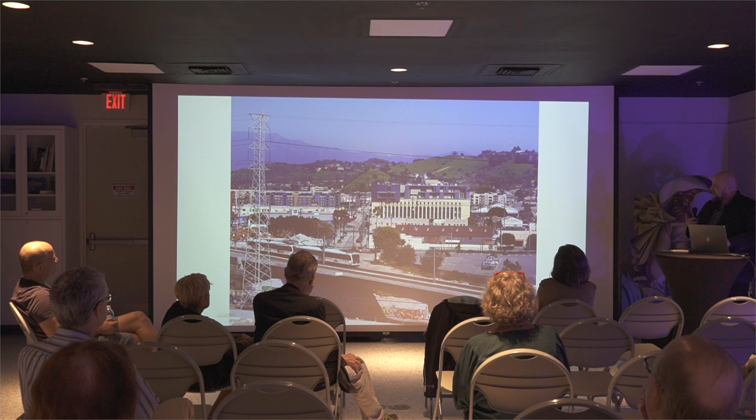This was done right at 2009, so it was at the wrong time in the market, as you would say. But you can see the quality of adaptive reuse, how sometimes old buildings can be brought to new life. This is just one of those examples.

A recent project we worked on - we like to do a lot of community infrastructure. These are parks projects, public realm projects, projects that are really near and dear to us. My partner Larry always says we don't have a specific typology we chase. We're known a lot for our affordable housing, probably about 50% of our work. But as he would say, we would do a doghouse as long as you'd let us design it well. We just care about design, sustainability, and the communities we're working in.

This project happens to be in Pompano Beach, Florida. I don't know if you're familiar with the Sample McDougald house, but that was a pioneering family in the early 1900s that came to - if you know Sample Road in Broward County, it was named because of the pioneers, that was their last name. It was a pineapple farm. The McDougalds actually bought the house from them, but they moved this house as part of the historic preservation of the home.

It was in jeopardy of being demolished. They moved it, and this number 2 is over that historic Sample McDougald house. What they asked us to do - this is a museum, the house is actually a museum built out of Dade County pine. It's a beautiful pioneer example of this early vernacular, cracker vernacular type house in this area.

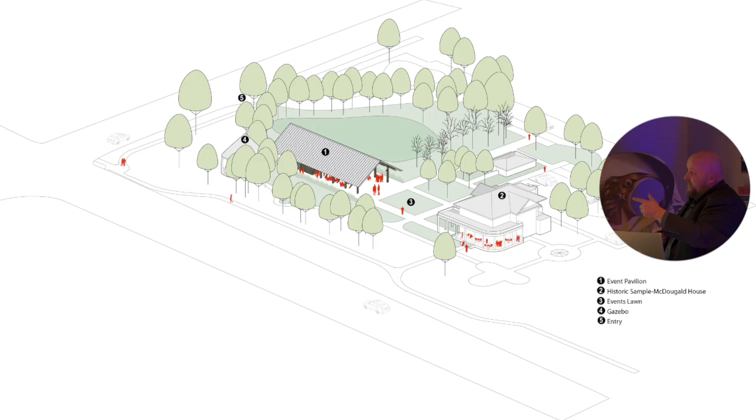The site is called Centennial Park - it was the 100-year anniversary that they developed this property. The house was moved there, and they asked us to put in a permanent open air pavilion for what the client called jelly jar weddings. They wanted a pavilion that could generate income for the property to support the museum and do other things.

They wanted the open air pavilion to look a lot like the house, and we said that was a mistake. So the first thing we really thought about was how do we make the building look laconic - that is, iconic, we all know, right? Big, bold. As an architect, you always want to do that; you want your building to stand out.

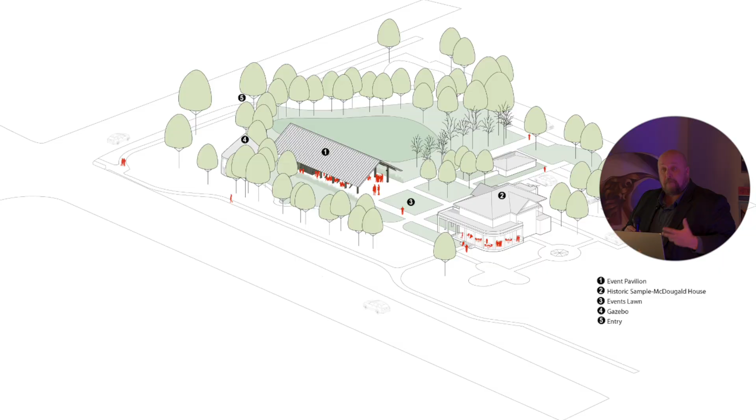But we thought this historic building was so incredible, we took a point to move it away from the home, tuck it into the trees, open up to the prevailing breezes to the southeast. North is actually the bottom of the page heading out, over this kind of open retention pond they have. And then really made it look more like an open barn building to that property.

But one of the key things we thought about too was, when you're in a wedding, it frames the historic home, so the whole historic home becomes the backdrop of this pavilion. It was really a challenge working with the community leaders, the city of Pompano Beach, and the Sample McDougald Preservation Society, because we were always talking about how this architecture was going to come to be to celebrate the architecture already on this site.

It wasn't until we finished the building, closed it down, and now they have events planned almost every weekend for the next two years, that it changed the mindset of this. So this building is actually becoming heavily used, having these kind of jelly jar weddings, but again paying homage to the original structure by just literally setting back

This also becomes shade infrastructure for the community. This is going to be for kids soccer, and if anybody knows, little boys love to destroy things, so we had to make this the most robust building that we possibly could. It's really a concrete jacket with this kind of yellow box rib inside.

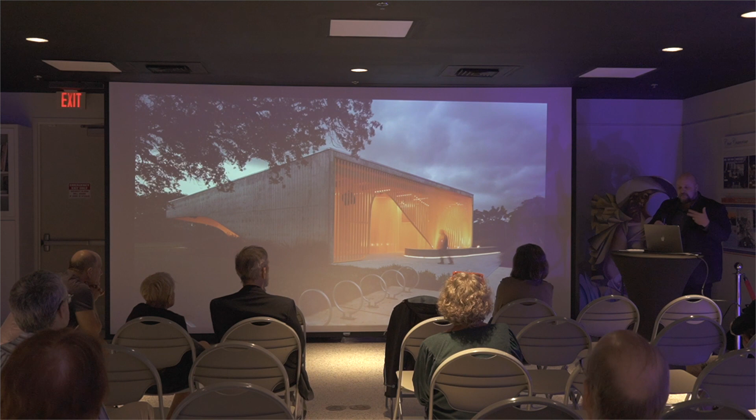But even from the street, this front facade operates like a billboard building in a way, and actually becomes part of the signage. Inside, it's a vernacular, traditional kind of building. It's a wraparound porch around what is office space for the parks department, restrooms, as well as a concession facility. But you can see we also put a robust amount of fans in there, because...

if you all know, a lot of athletes, especially young athletes, are overheating now as we get hotter temperatures. So the building was really meant to harvest the southeast prevailing breezes, but also become a piece of cooling infrastructure and heat infrastructure for the community.

This was done just before the pandemic, when we had the building designed, and it was under a GO bonds project. If you know GO bond, general obligation bond funding, there's no extra dollars in anything. This building was about $700,000 budgeted before the pandemic. If you know what happened in the pandemic, 36% escalations roughly in costs, and we didn't get an extra dollar.

So we really had to work with the city to figure out how to do a simple building. It's amazing what $700,000 buys. We're doing a building right now just to change all the door handles in a 50,000 square foot building, and that was $1 million, just to put it in perspective. Things have gotten a little crazy in costs, but this $700,000 building felt like the best way to do a lot of community infrastructure.

Now, the broader park was about a $7 million park, and it has ball fields. We did a lot of preservation of the trees on site, and actually moved some of the trees near this building to preserve them.

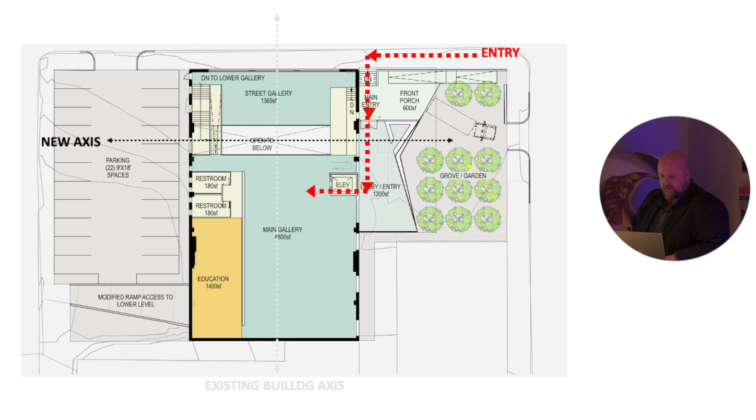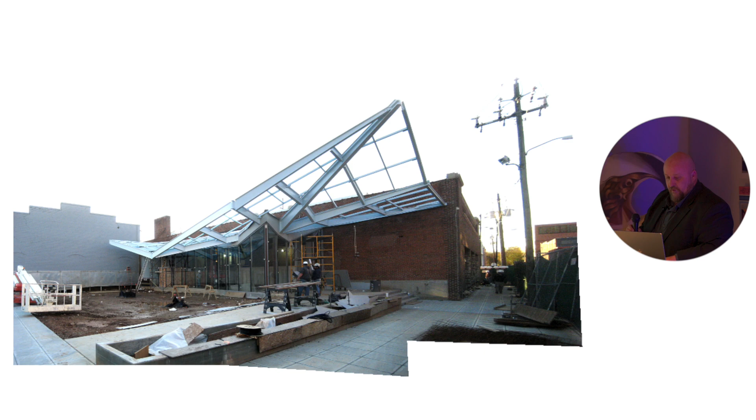We did this by looking at the facade. The front facade along the street, which I'm not showing here, was the historic preservation facade. But we were able to bring in a new entry to the side and this new porch piece that we were designing to integrate it. So this is the historic facade, and this is the new one we were able to open up to become the new entry into the old structure.

And we actually renovated, brought back the historic facade here, but really created this community space, a community porch. That's really the new entry into this.

I don't have any interior renders, but you can get a sense of it - this kind of metal screen, lots of copious shade, and it can be used heavily for events. This is one of those spaces where the museum got this double-dipped aspect, where now they rent out just their porch for weddings and other events and parties.

This is the kind of thing we're always thinking about - how do we get elements in our architecture that give us more than one thing? One plus one has to equal three in some cases, right? I know we don't do elementary math that well, but we're always looking at how do we begin to accentuate, promote, activate, and utilize these elements so they can't get value engineered out.

What I always call value engineering is really devalue engineering in some cases, because if you have an element in there that does these performative things - and this one shaded the building too, allowing us to reduce the size of the mechanical equipment, not use insulated glass on that facade because we were shading it, and some other smart things.

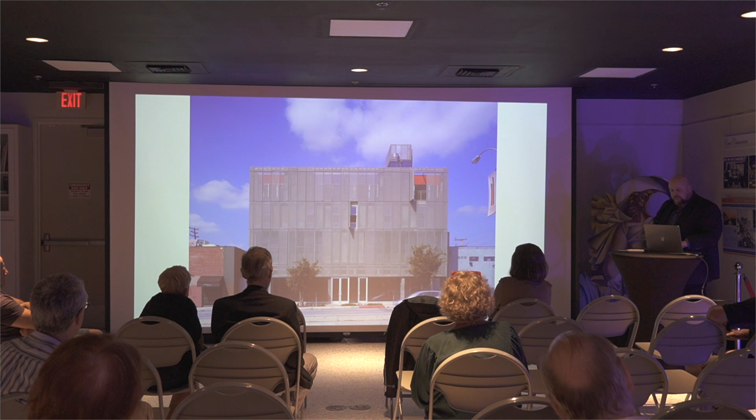We do that even on this building - another building that pre-exists, but we're looking at these apertures and how that plays to screen and shade the building. So I'm going to talk a little bit about this project.

If you're familiar with the Art and Culture Center Hollywood, this is their current building - the Kagey Mansion from 1924. It was part of Joseph Young's - actually Kagey was one of Joseph Young's best salesmen and won this house from Joseph Young, who was the founder of Hollywood, was given this.

Now the arcade and other elements to the left here were actually added on as a funeral parlor in the 1960s to the house, the Mediterranean revival house you can see in the back. The Art and Culture Center of Hollywood asked us to look at an addition of 5,000 square feet of a new arts education wing. This is right off of Arts Park, Young Circle in Hollywood, off of Harrison.

And what we came in with is this new addition. If you know Hollywood - and we didn't even show it in this rendering - but there's now a 30-story high-rise going in right across the street. The bread building was just off to the side there, but this 30-story high-rise is coming in here, and it was really going to overshadow and overpower the building.

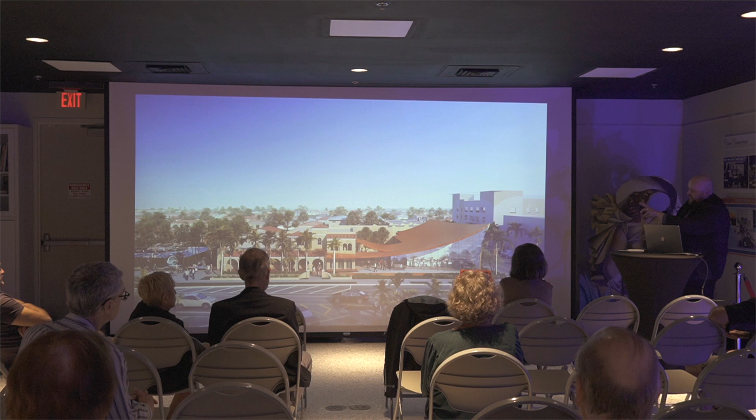So our key concept was to really bow down to the existing historic structure, almost tie in some of the language, backing up, and then bring in this swooping roof form that scaled up to the presence of the street, but allowed for community activation of this multi-purpose hall space at the front, which faces north.

Everybody always asks us why we have so much glass on a building. Well, this was facing north, and we're integrating some new technologies into this too that I won't talk too much about tonight. But it's now about to start construction - I'll be breaking ground December 14th. I really think that they're not going to break ground on December 14th.

It will probably be after the first of the year, but this is the view from the street level, so you can get the presence, but again, we're trying to pay homage.

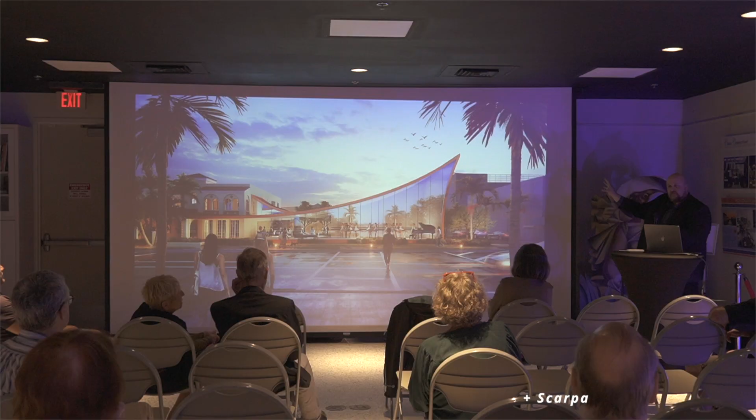The interesting thing is this will be completed in 2024, and the building is from 1924. So it's this kind of celebration of the 100 years between these two projects, and really talking about innovation.

One of the biggest things we see now in historic preservation is not to try to mimic what the historic building looked like, but still pay homage to it, respect it, and find the scale, the proportions, the massing, everything that can tie back into it. That was important, even though this building is not on the historic register. It's locally listed, but not on the state or anywhere else, and that's what we found interesting.

Most buildings we work on are not historically on the national register or even the state registers, but we still find the value, and we try to talk to our clients about maintaining it and keeping those ideas.

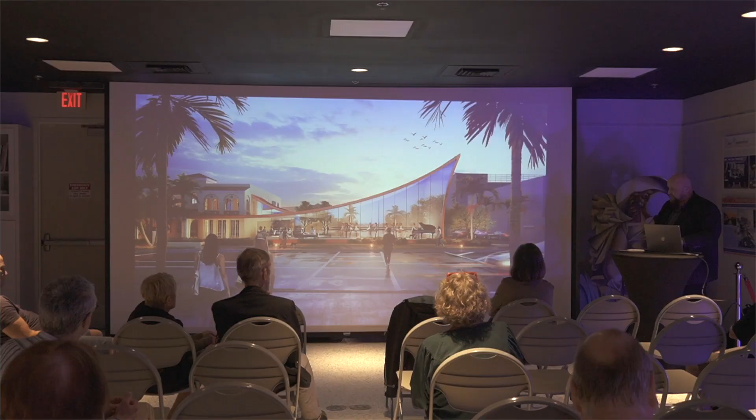A key concept here is that they can have a multitude of events still happening in their historic structure while they have new events happening here.

Even in that entry, there's this kind of glass vitrine between the historic and the new structure, and it goes out to a courtyard. That courtyard becomes a space that they can also lease out.

Again, these ideas of being able to rent and have three events going on simultaneously while they can still maintain it really helps their bottom line, their maintenance and operations.

Currently, we're working at the University of Florida, which is my alma mater. I graduated there in 2004 with my master's of architecture. It was really humbling two years ago when we were given the honor of being hired to restore and look at the existing structure, which was a brutalist building done by Spillis Candela in 1980.

We're adding on what we're calling the wishbone, these two curved forms called the collaboratory. The existing building is about 100,000 square feet, and the new collaboratory is about 56,000 square feet.

The new collaboratory has all the high technology from the College of Design, Construction, and Planning -- fabrication labs with robotic arms, laser cutters, and all of these different things. But it's also called the collaboratory because the upper floors are meant to be collaboration spaces, education spaces.

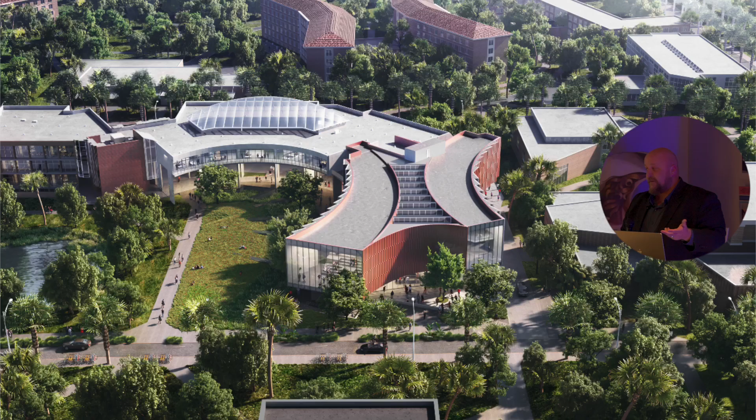That's the most important thing right now in higher education, especially in research hubs -- interdisciplinary, intercollaboration. That's why it's called the collaboratory. It's right along Stadium Road, across the street from the historic areas of the campus, hence why we had to look at innovative ways to tie in brick onto the building.

This brick also had to meet a pretty hard budget. Most state institutions have those. So how did we go ahead and think about this in an innovative way to still get it done in 16 months? This building is going to be built out of steel; the old building was out of concrete.

The only reason for that is because the cost of steel is much cheaper than concrete right now. A truckload of concrete used to be about $400 before the pandemic; it's about $1,500 right now. So it's gone up about 4 to 5 times in cost.

And steel is starting to -- not come down, but it's leveling out. So it just made more sense.

Normally you would not put brick on a steel building, so we're prefabricating these wall panels and they'll be hung onto the building. This gives us far superior insulation and sustainable components, but we're also able to compress the construction time schedule much more, because we're already under construction and they're already starting to fabricate the panels. So these buildings will come together pretty quick.

I just wanted to showcase the existing structure, because some of the things we've already started doing in the existing structure -- this is the atrium.

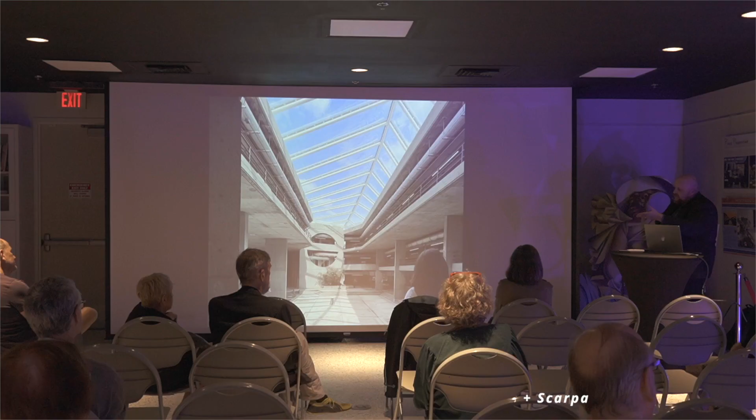Even now the music building is right next door and the band comes in there to practice, and it's these percussions and elements that happen there that make it special. They could never really use that atrium space for models, for drawing, showcasing the students' work, and now it's used heavily for all their fundraising events too. This was just one of those serendipitous elements, a kind of funky space.

We called this concept the harp, because it's really just a ridge beam at an angle that casts over there. This is another view of the collaboratory itself - you can see that canopy on the far left on top of the roof of the historic building. Then this new collaboratory is really trying to play off of the brutalist building, bringing this in with the new brick facade.

Interestingly, it's a sawtooth facade, and you can see we have these long glass elements that all look out north, so again no direct solar heat gain - it's all indirect light coming in. If you look inside the large picture glass, this looks out at Tigert Hall, which is the most historic, the oldest building on campus, or at least one of the most well-preserved ones.

We have this social stair that steps in so you can really hang out there. We're trying to preserve all the trees and work around them, and that's one of the reasons the shape of the building got to be that way.

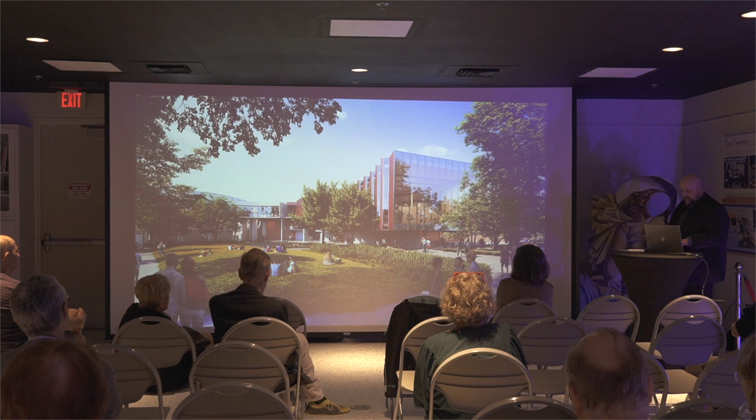This is fun because I can actually show this tonight - we couldn't show it yesterday, but we were in Sarasota reimagining a Pei building. If anybody knows I.M. Pei as an architect, he only did one building in Florida, and it's on the New College campus. We were asked, out of three firms, to come in and reimagine what we could do with these buildings.

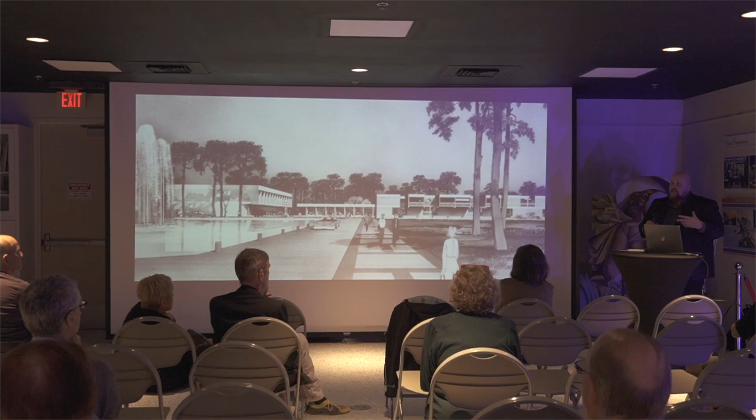These were the former student dorms on the facility, and they're in bad disarray - we were talking about mold, mildew, and what a lot of people have called bulldozer bait. We did not want it to be bulldozer bait. It's like, how do we preserve these buildings and give them new life? This project was reimagined to transition into these buildings, adding a 3rd floor, because one of the biggest issues was water intrusion.

Again, kind of like putting a hat on it, we were really evocative to the bay. Sarasota Bay is an amazing space, so we were calling this 'from Pei to the Bay, or from the Bay to Pei,' bringing in this kind of water and sand, these blue terracotta elements.

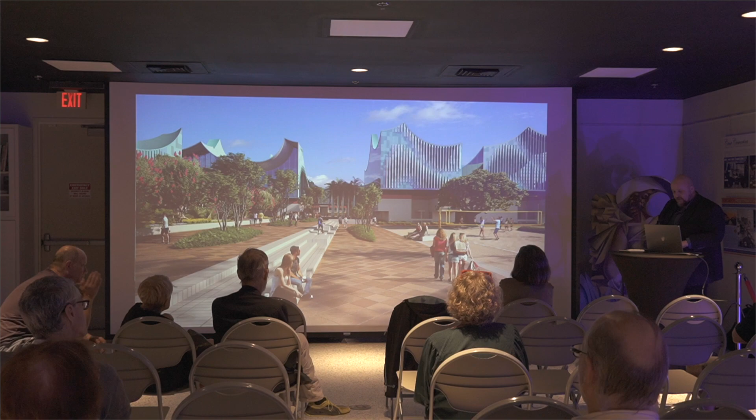Because when Pei designed this, he called it a Mediterranean village, so we were adding some Mediterranean Sea elements. This is the kind of section we get, but we were really trying to go light, and I know it doesn't look too light, but the building floats over. It's a wellness center as well as a community space, since the new university president is really pushing this to be a sports and active kind of learning area.

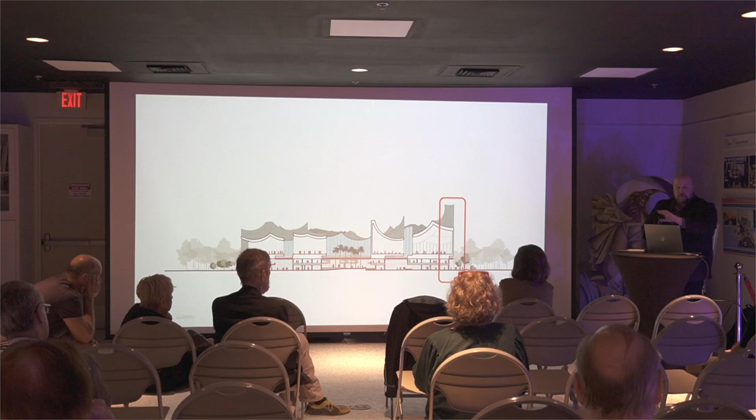So we're reimagining the Pei structures, which could never have large grand public rooms for community gathering or gyms, but we could recreate them into classrooms, wellness and yoga studios, and other elements. We were able to look at how to do this innovatively. You can see the Pei buildings in that middle drawing are the two floors below that, so we lift the new building up over there and come back in surgically with this new structure.

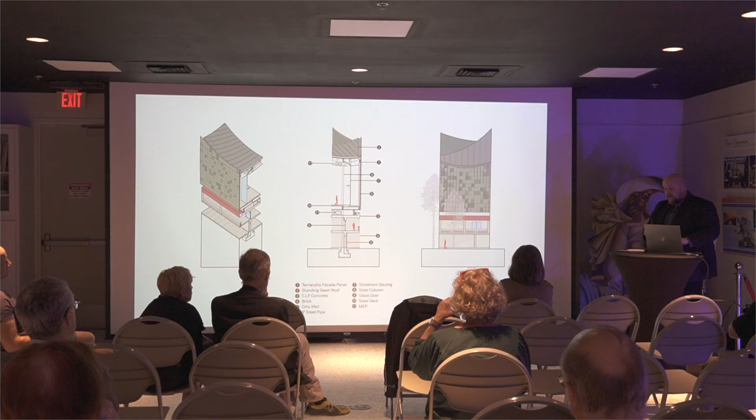So we're not compromising the structure of Pei, but in between that floor we also put a new plenum of mechanical, electrical, and plumbing that we can drop in below and also bring in from the top. This really allowed us to open up Pei's building even more and now insulate it. It never had insulation before, and it's really providing a lot of shade and other interest to the project.

This is another fun project we were just asked to look at, part of an exhibit called Brutal DC. If you're ever at SUMA, the Southern Utah Museum of Art, it's there right now, but it's going to be moving to the National Building Museum in Washington, D.C. next year, early next year.

We were tasked with looking at the brutalist structures around the D.C. Mall. If you know what's going on right now, 90% of those buildings are vacant, and they're office buildings, federal office buildings. This is the former HUD, Housing and Urban Development Building, the Weaver Building, done by Marcel Breuer. It's about 90% unoccupied right now.

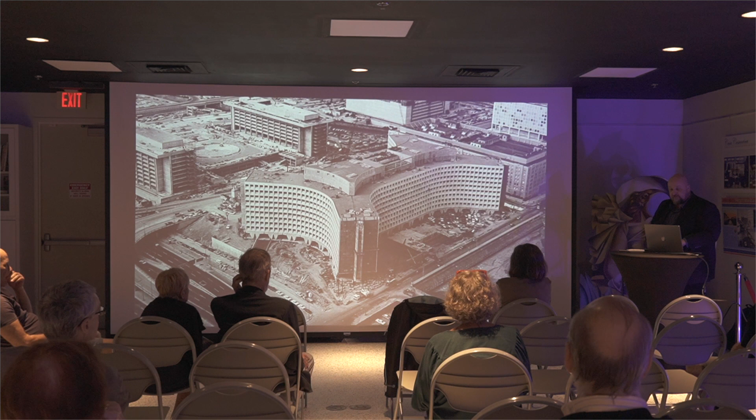So we thought this was kind of funny because we wanted to convert it into affordable housing—it's the HUD building. How do we come in and give this building new life? There's a lot of issues with it, from water intrusion and other problems, so we began to look at how to approach it playfully.

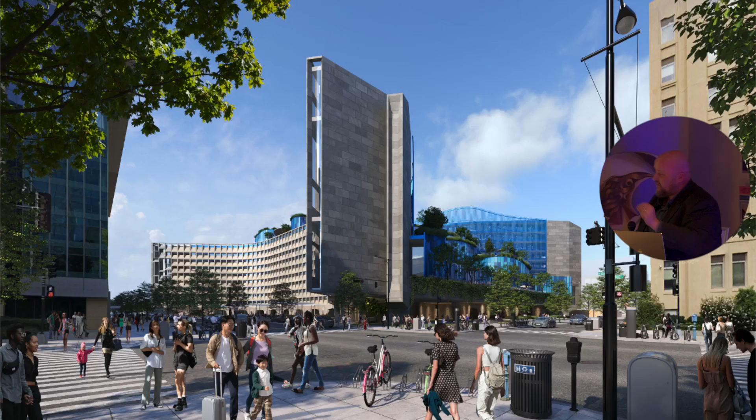We wanted to preserve these outside walls, the brise-soleils that were there that made it that signature brutalist structure, but come in surgically into the inner parts with more playful, artistic, bold colors. As Daniel pointed out, we like bold colors, so you'll see a lot of blues, pinks, and yellows in our work. This is kind of what it looks like over the top.

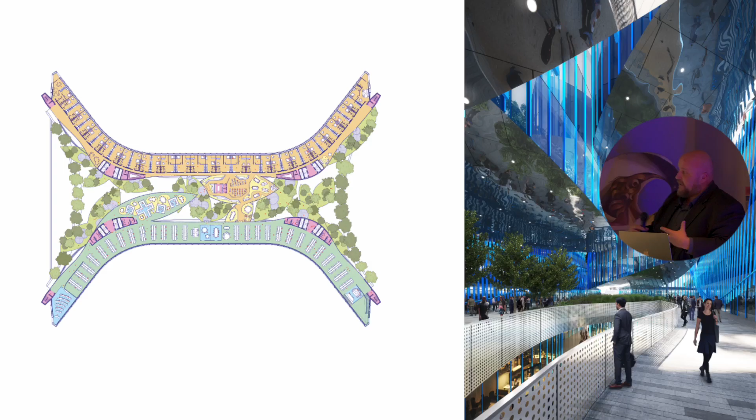So really, we're refocusing the housing social spaces to the center in that courtyard, terracing and integrating roof gardens, elements that could harvest rainwater and move that water around, making it a more sustainable building. These are some of the adaptive floor plates we were beginning to use, with these petal-like leaves that have social spaces, which could be co-work as well as affordable housing or market rate housing. We were thinking it could be ambidextrous, allowing for a lot of different activities.

And the pink areas are the existing cores of the building, so we were able to adapt those. This image is the inside courtyard area with new leaf-like structures that, again, we like making things whimsical, so we mirrored them on the underside.

So you had this reflectivity, really allowing daylight to get deep into the space, which was not currently happening. I'm going to pivot a little bit now, because I've been working on this project for reasons why I moved back to South Florida. I talked about Hurricane Andrew, it was a pivotal moment for me.

But what I saw in 2014 when I moved back is one of the biggest challenges we have is how are we going to deal and reconcile climate change, issues around sea level rise. How are our buildings, how are our cities, how are our places?

And so I've been working through Florida Atlantic University through our research, but also through our office at Brooks Scarpa on a project I call salty urbanism. Salty urbanism is a pedestrian term, a play on words, salty, gritty, but salty because it's going to be salt water. But its actual project name was ADAPT, an acronym that stood for Adaptation Design and Planning Tool.

And so this is our manual that's about to come out at the first of the year. It's a compendium of all this work that was really looking at how are we going to engage in developing coastal resilience in our cities around sea level rise and climate adaptation.

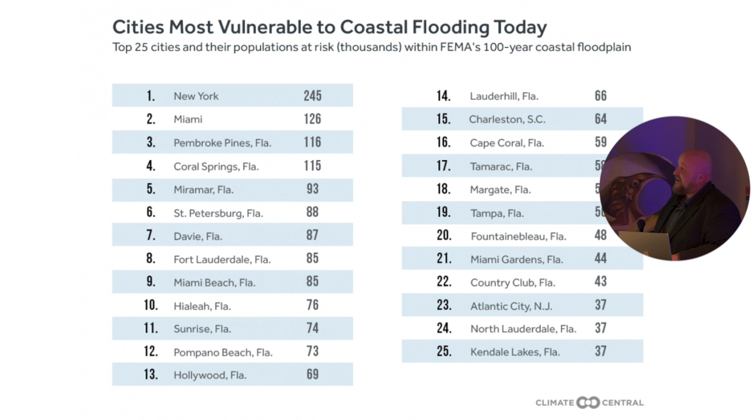I'm sure many of you are maybe familiar with this, but these are the 25 largest cities most challenged with coastal flooding. Don't worry, I did a cheat sheet for you, I just took out the 3 that aren't in Florida. So 22 of 25 are in Florida. And you can see we rank pretty high in South Florida.

So I want to be an optimist because that's fantastic. It may be great fishing, but the challenge is how do we learn to live with and over water? It's really what our grandparents knew how to do in this area. And just as the Eskimos have 100 words for snow, we really need to think about

the ways in which we flood. And we have 5 ways we flood: around storm surge from coastal storms, we have rainfall, we have urban runoff.

And so one of the things we don't think about is that most of our urban areas, Miami Beach is no different, is about 90% impervious. And when you put that in perspective with the research and the data, 10% imperviousness in a watershed begins to show environmental degradation, 30% is almost irreversible environmental degradation.

So our urban areas need to do a lot better at linking ecosystem services with urban services. Just like we build roads, streets, fire, police, water, sewer infrastructure, we need to start thinking about how do we inculcate, how do we adapt and put in ecosystem services. These are primarily defined as 4 services that ecosystems do for us.

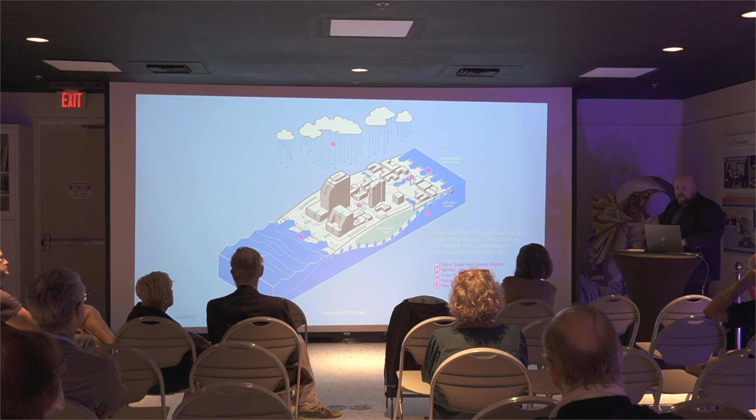And so we really need to begin to think about South Florida much differently too, because we have a porous limestone substrate. We're not like New Orleans that can build levees and dikes. But I find that as an amazing proposition for us, of how we can rethink how we live on, with, and over water. That's going to be a really critical thing as we're looking into the future.

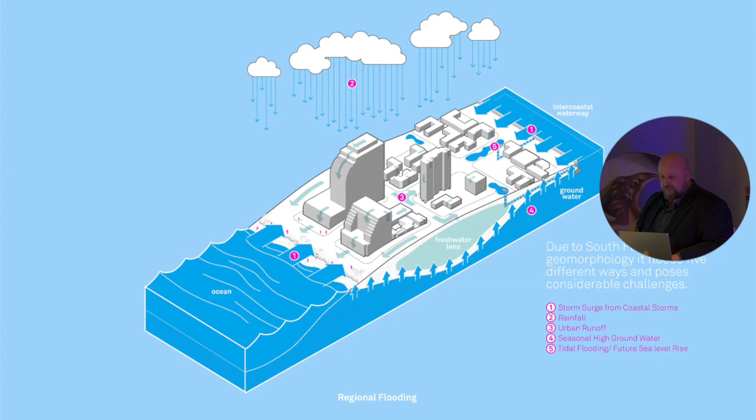And that's just an unfortunate aspect, but why did that happen? It's because we took away the sand dunes, or what let's really call them, the root dunes, right? And we did that for obvious reasons. We want to have that view, that kind of linkage to the beach, but there's ways in which we can begin to do that in a smarter, more aesthetic way.

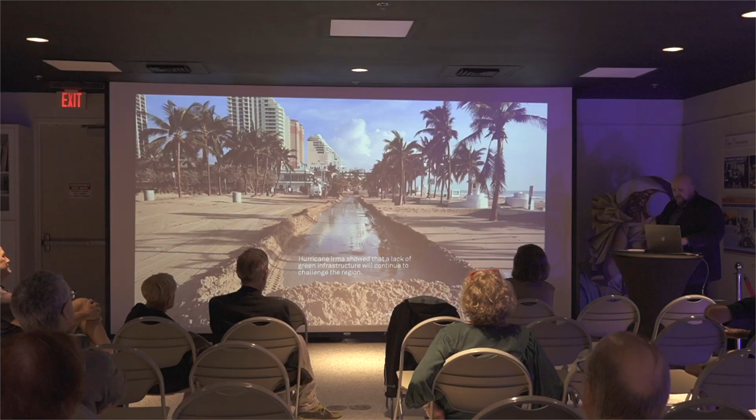And so that was a huge challenge. And it wasn't just 24 hours. It really fell in only a 9-hour period of time.

But it really made me think, in South Florida, it's kind of interesting. We have fire extinguishers in our buildings. We have all these other things, but we don't have flotation devices. Why not? We should probably be thinking about that.

But these students were very entrepreneurial. Moxie's, which is a bar downtown, they were able to ferry people from Moxie's to their cars, getting $100 here and there. It was a pretty amazing thing. But we had these boats in our building that students 15 years ago built, and they had never been utilized in 15 years until this event.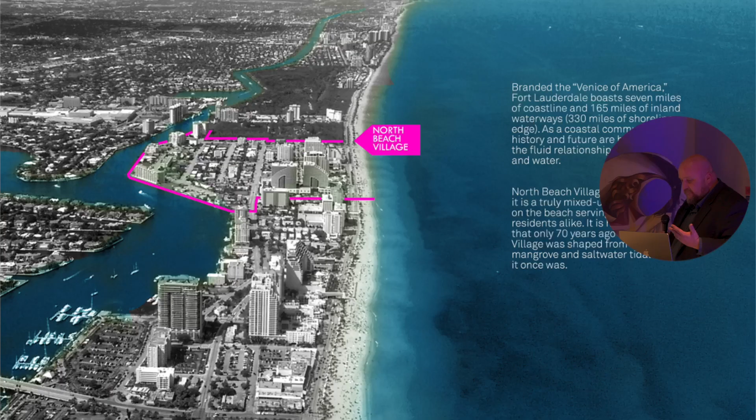So what we began to look at was the city of Fort Lauderdale asked us to look at North Beach Village, which is a little enclave just south of Bonnet House, as you see the green tree patch to the north of those pink lines there. And they asked us to look at this.

And it was a great example, because if you project this 6 feet... and by the way, Fort Lauderdale brands itself as the Venice of America. So I told them, well, if that's your brand, let's make it the Venice of America.

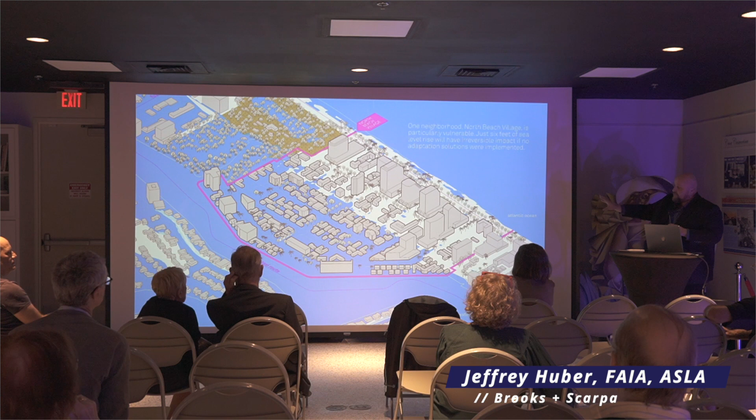But this is what's going to happen if they don't do anything at all. This is actually 6 feet projected over that neighborhood. And this is where they have some of their largest mid-century modernism, where Charles McKirahan and a lot of those types have their architecture. So it's a big challenge how they're going to adapt with 6 feet of sea level rise and that permanent inundation on the western part of this neighborhood.

And that western part was actually reclaimed from the ocean. It was old tidal marsh. So I always say, if we reclaimed it from nature, nature's going to reclaim it from us pretty soon. But there's ways in which we can work with that. You can see the coastal ridge, much where we're standing and sitting here today, it's going to be high and dry for the extended period of time.

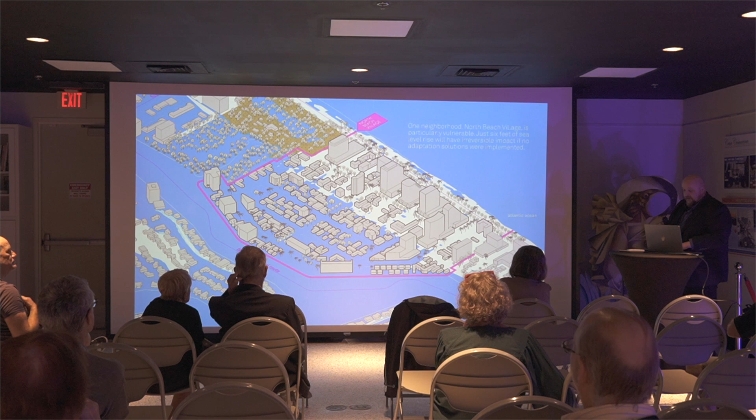And so what we asked in this Salty Urbanism project was, how do we begin to look at a couple different toolboxes, one of which was this forensic ecology. How do we understand what was once there as a model for how we begin to think about the ecology, the geology, and the hydrology of the area, and really think about what type of landscape species are appropriate to go there.

And then that was like one aspect. So we studied the barrier island. This is just a section of the barrier island.

We did this across all the different ecotypes in the South Florida area, whether it be the Everglades, the transverse glades, the coastal ridge, and these barrier islands.

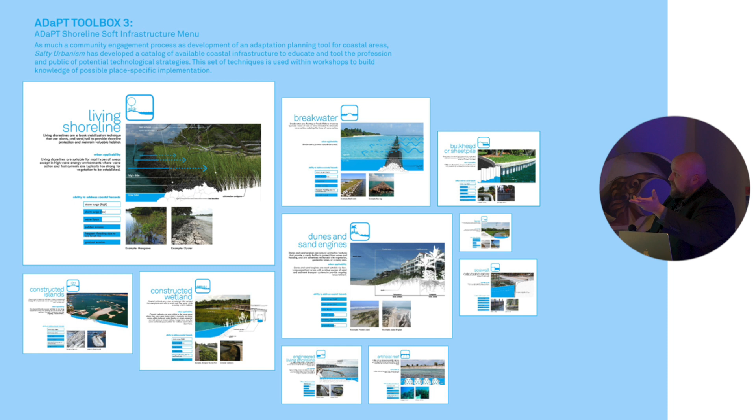But we also had another toolbox, and many of these are things we know: living shorelines, root dunes, breakwaters, sand engines, constructed wetlands, so on and so forth. What we would term green infrastructure, or green stormwater infrastructure, GSI, or what some refer to as low impact development infrastructure technologies. So these are the kind of techniques, but two, we also developed the plant palette.

And then looking at the architecture, how do we begin to think about flood adaptive architecture, and everything from left to right, abandonment, which we really have to consider. Just like cities have planning departments, I think they really need to start thinking about unplanning departments.

One of the things we really wanted to look at in this idea of unplanning was, if buildings are going to be susceptible, we're not imagining people are going to go there and demolish them and take them away. That's kind of a fallacy. We need to start thinking about them as artificial reefs in the future, or something to that extent.

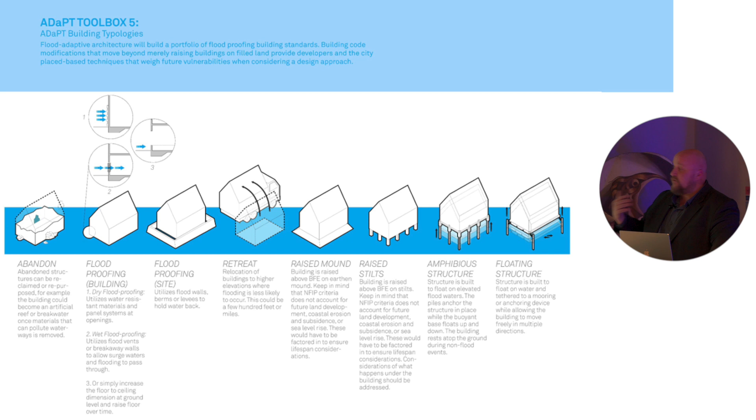A lot of those second tier aspects on the left-hand side are things that even the city of Miami Beach does a lot of: wet flood-proofing, dry flood-proofing, raising things up on mounds, stilts, but even looking at amphibious or floating structures.

The fact that we have all of these typologies already exist here in Miami Beach. You think about Stiltsville, just off of Key Biscayne. I can remember there as a kid boating around, and it was fantastic. You'd have this community out there. Now unfortunately there's only 4 or 5 houses left.

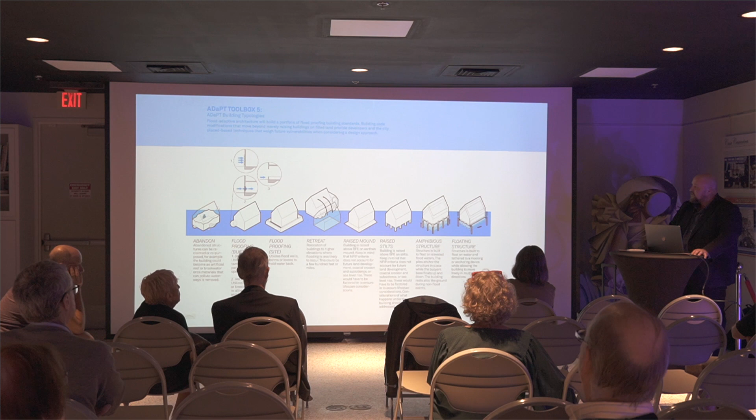And we have these kinds of technologies, or this kind of history, but we've kind of chosen to build in one way as a rubber stamp approach. So really what we're asking with Salty Urbanism is to reinvent and rethink, especially when we're trying to create more affordable places. So when we came and brought these ideas to the city of Fort Lauderdale and to this North Beach Village neighborhood, we developed 3 scenarios.

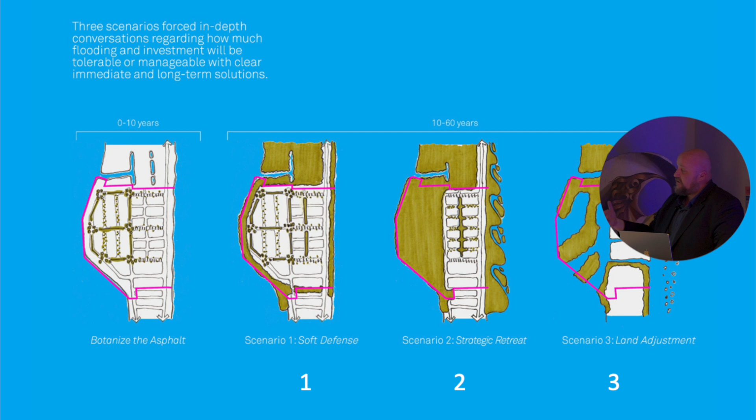And so these 3 on the right are the 10 to 60 year options. This is what they have to do, because one of the things that's hardest to think about is where sea level rise is going to be at in 60 years, right? Things have changed a lot in the last 60 years to today. So you really have to put that mindset in.

And unfortunately, in our planning departments, a lot of them look at the last 3 to 5 years to project the next 3 to 5. And that's a mistake, especially when the game's changing.

So these were put out there as ways they could do it, because 0 to 10 years, you're really having to plan for it, figuring out how to buy it, how to pay for it, designing and engineering it. So these were the 10 to 60 year options, and it's 2 mortgage cycles, if you think about it that way, or the life of infrastructure, which is about 50 years.

So you're really thinking about what is that next cycle? The Brookings Institute has this staggering statistic from about 2 years ago that said 80% of the built environment projected to exist by 2050 currently does not exist. I'm hoping some of those are going to be adaptive reuse of historic structures.

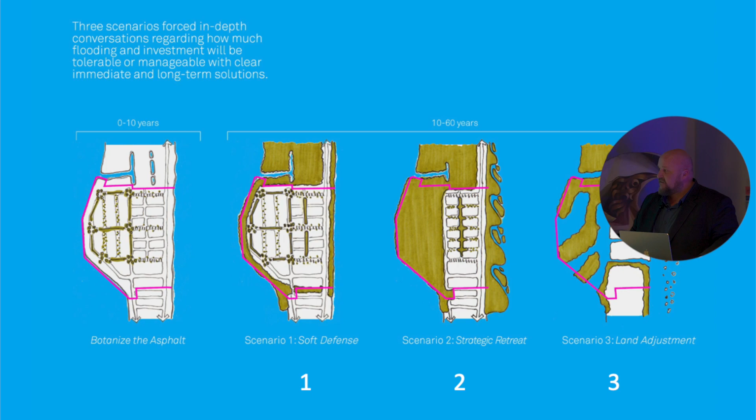I think that's our mission, is how do we begin to think about those historic structures? But this is our opportunity. If things are going to change that drastically in the next 30 years, we have a unique opportunity right now to look at the next level of development and get it right, making it pay for itself. I don't think the federal government's going to come in, I don't think the state's going to come in. How do we design and plan and manage for this?

So the first 0 to 10 years, we told the city of Fort Lauderdale: if they're going to make private development, do these things, but we need to start looking at how the public realm is going to take on these challenges. So what we call botanizing the asphalt of North Beach Village. Remember what I was saying about 90% impervious surfaces in urban environments? This is 90% impervious in North Beach Village. So we started to ask them to begin to look at this kind of green jacket.

One of the things, if anybody's ever tried to get a permit with the Army Corps of Engineers, it's like an act of Congress. You have better luck getting a meeting with the Pope than getting a permit from the Army Corps of Engineers to put anything out into a navigable waterway, anything 18 inches past the line of a seawall.

What we looked at, talking with the developers in North Beach Village, is they were willing to give back a whole full block, about 150 to 200 feet, back to nature if they could go ahead and get some transfer development rights and other aspects to begin to build this.

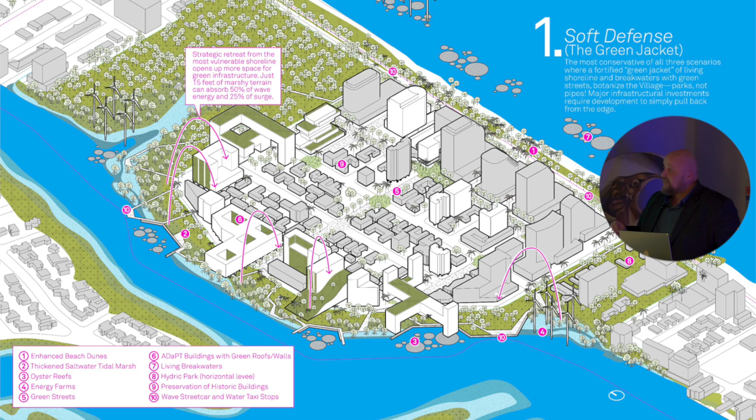One of the things, I don't know if you can read it there at the top, but just 15 feet of marshy terrain, a shoreline edge, can drop wave energy by 50% and storm surge by 25%—just 15 feet. So if you're getting 200 feet, 300 feet, you're doing a lot to protect the buildings and communities around those. This was the biggest challenge: how do we begin to get the city to think in these ways?

Because it's not a fun thing to think about—having to give up property or do these things. But we're coming into a time where cities are going to be forced to make decisions about de-annexing or unplanning areas unless we begin to think about them first. So what salty urbanism was trying to do was look at the neighborhood unit down to the scale of the block, down to the scale of the building.

What we're doing really well is developing policies at a city, at a regional level. But what we're not doing well is working with those neighborhoods and figuring out plans to make them more resilient, because that takes design, and that challenge to really get down to that is very tough.

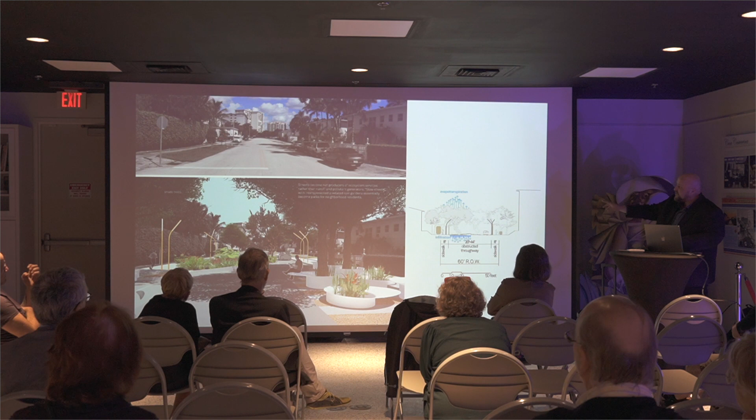This is what some of those streetscapes looked like—this was actually a nicer street at the top, the existing condition. It had some green swales, like grass swales, but most of it was asphalt from building edge to building edge with parking lots. So this botanizing the asphalt was coming in and creating these rain gardens, which had a double benefit of slowing traffic down, creating more slow streets in these neighborhood and residential communities where you get yield conditions, but also bringing in ecosystem services like evapotranspiration, filtration, and other aspects.

I bring this image because this is not North Beach Village, but many of you may know what the top image is—the Garden District in New Orleans. Many of you may not know the bottom image, but that's the point—if you didn't see the hill in the background, you'd probably think that was out west of town in the suburbs, right?

That's what modern codes have done—they've diminished ecosystem services in our built environment. But what our grandparents all knew was how to build healthy neighborhoods, healthy places that looked at the triple bottom line: how they created economic, environmental, and social spaces.

You're seeing these kind of conditions, but I don't know if you know how our streets are designed in our public realm. They're based on what's called the Green Book. There's nothing green about it—when AASHTO, the American Association of State Highway and Transportation Officials, developed the book, they sent it to the printer, and the printer didn't have any other color but green. Green got put on the cover and it just became affectionately known as the Green Book.

In that book, they call trees FHOs, fixed and hazardous objects. They call sidewalks auto recovery lanes. So it doesn't bode well for pedestrians in the way we've designed streets for the last 60, 70 years. That's our biggest challenge.

When you go into these neighborhoods, this is what I always ask the mayor, city commissioners: what neighborhoods do you love in your community? And they will inevitably always say the 100-year-old neighborhoods. It's because those are the neighborhoods that are neighborhoods—they're not subdivisions, they're not cookie cutter, they're not repetitive.

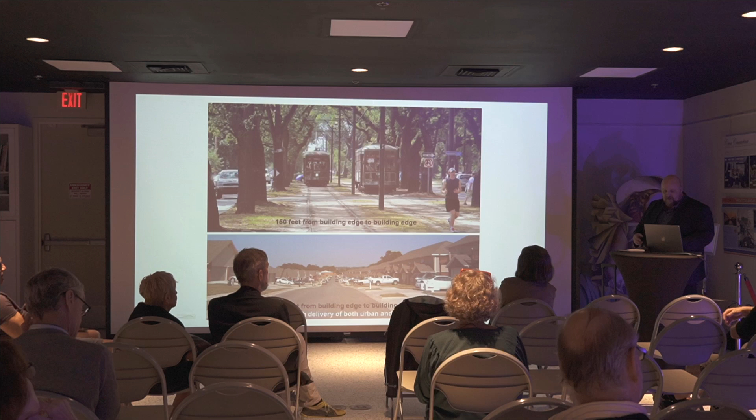These are the kind of challenges we're trying to look at—how do we begin to make place? So this was another option we talked about: this kind of strategic retreat, which was moving away from the Western area, but it wasn't saying we couldn't build in the West. It was just saying we may build differently.

We'd have some of these amphibious or floating structures—actually buoyant platforms that could move up and down with the tidal flooding, the sea, storm surges, and other elements. It was also interesting to look at how you make this life aquatic.

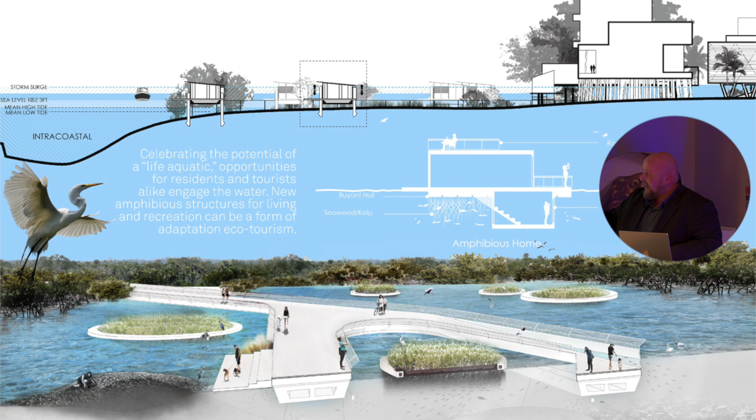The other thing we were always asked is how do we deal with the state bird, the mosquito? You know, the mosquito is a big challenge. One of the reasons why we got rid of the mangrove forest was because of the mosquitoes—they bring and breed disease.

Zika was a huge thing when we were first planning this, now with COVID and other things. But these are things we can develop new ways of thinking about—ecological pest management, like bat houses, purple martin houses.

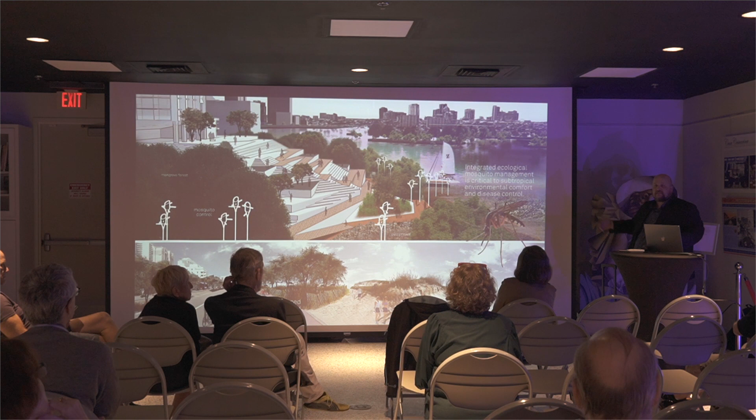The other thing that's interesting is dragonflies. I love them, but they eat mosquito larvae—their weight in mosquito larvae in a day, just like the purple martins and the bats will do for the most part. So these are things we need to bring back and look at how we work with them.

This was the third and final proposal, and it was the most radical one we asked the community to consider in North Beach Village: this land adjustment, this kind of islands and atolls.

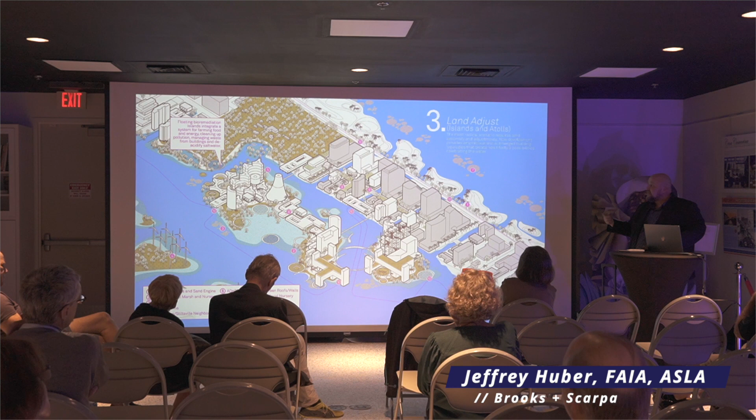It had this dual benefit of branding it the Venice of America because you had these waterways around it, but it created more shoreline edge—because shoreline edge creates more ecosystem services, like living shoreline, these marshy terrains—but it also created more land value because the edge is where the land value is. That's where you had this kind of duplicity.

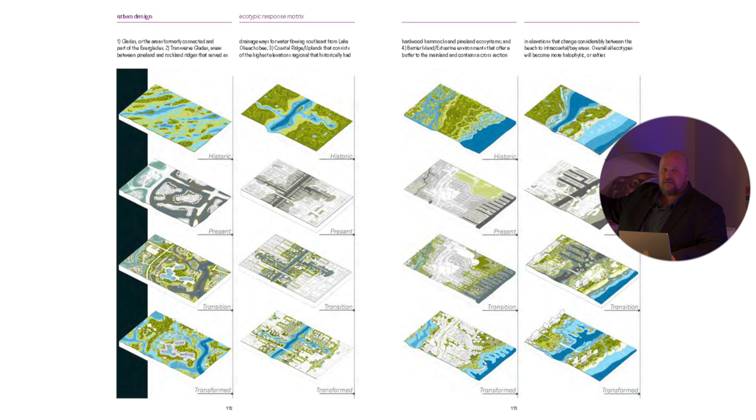And so we've kind of stepped it now—I'll just breeze through this real quick because I know it's hard to read some of these things—but we started looking at how do we apply this across the matrix of South Florida at different ecotypes.

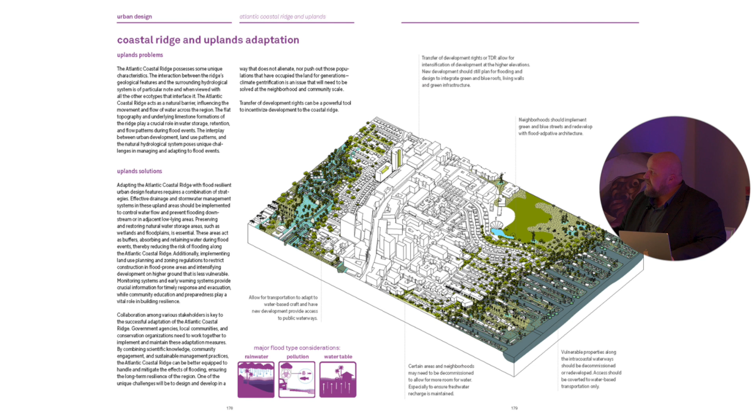Looking at the Everglades, how do we do that? Looking at these transverse glades where the canals were, how do we begin to thicken and widen those canals to integrate communities that are more water-based or more flood resilient? Then looking at the coastal ridge and the coastal corridors and how we begin to design them—a lot of this is built into that manual.

I'm going to leave on these last few projects, which are where we're testing these ideas out now in the real world.

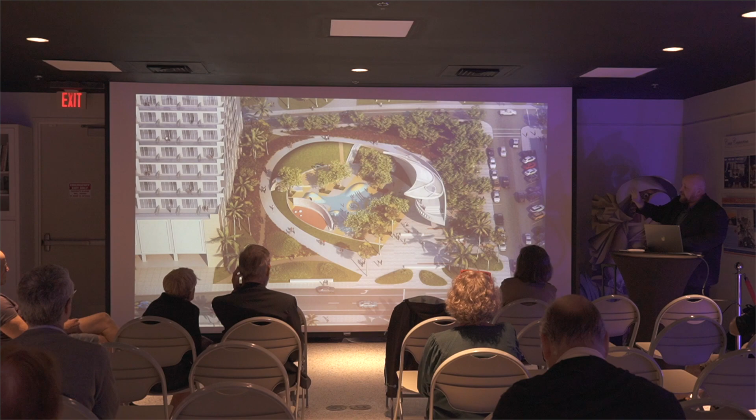And so this park is gonna look like this when it's done. Right now it's a parking lot, right across the street from the Swimming Hall of Fame. But one of the things that we did was reinvigorate, redoing and restoring the coastal dunes in the front, creating a kind of plaza, a shade hammock, and this protected play area that's a playground in the center with rubberized facilities for kids.

But we're moving up a new dune that's about 5% slope. And why we did 5% slope is because you don't have to have handrails and all that other stuff that just gets in the way and looks ugly. So it's just a gentle slope that moves you up to this outlook, this perch of about 25 foot over the natural grade, where you can watch the moon rise and the sunrise and everything.

And it's got stadium seating that you can kind of see in the nose there that kind of steps down. I thought I was evoking a jumping tarpon out of the water. Some people say it's an iguana. You take your pick, whatever it is.

But you know, this back of it was all coastal strand or coastal dune infrastructure, ecosystems infrastructure. And so the existing site is there on the left, kind of how that storm surge, like I was showing you that image of the sand. This was in front of this project.

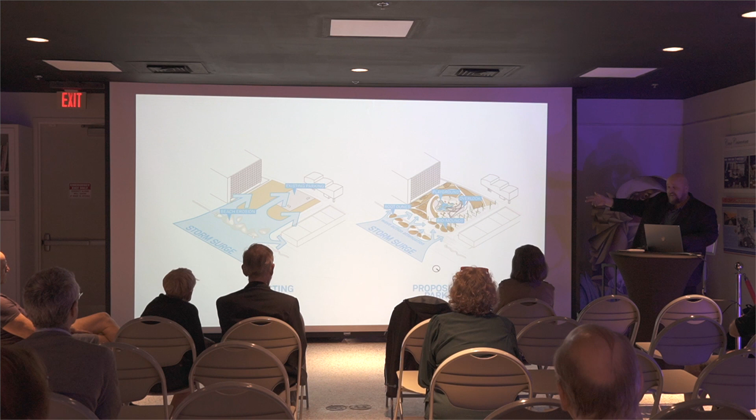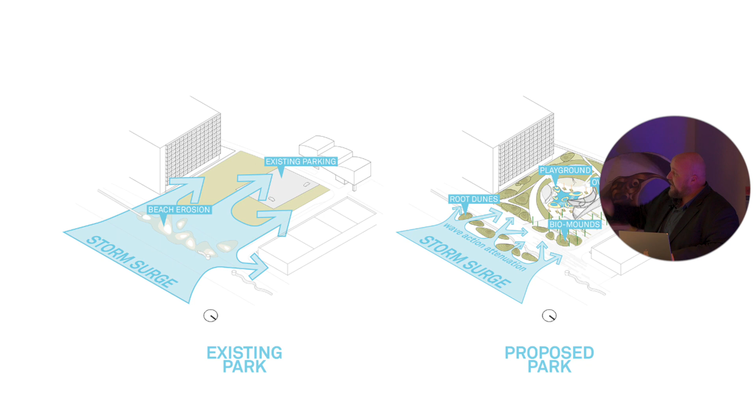And so we're actually going to be enhancing some of the dunes on the wave wall side, on the beach side of this. So you're seeing what the new park will do is kind of begin to break up that wave action, but also keep the sand in place and begin to protect even the hotels and the Swimming Hall of Fame behind it with these elements that we're doing. And so we're building it right now.

And so this is the kind of view of what that looks like at the ground. And that's planning to be done around April.

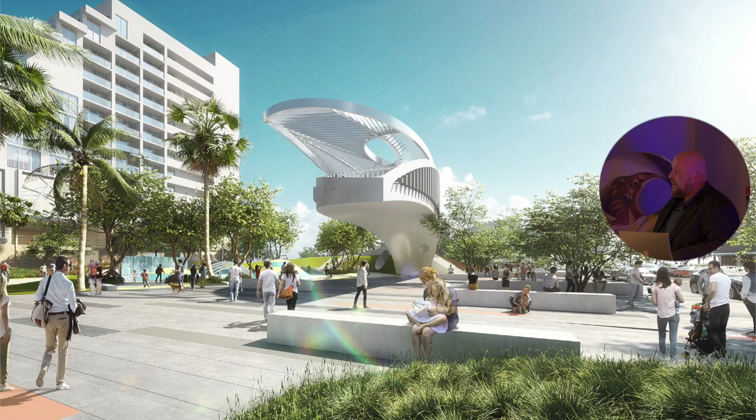And so this was kind of a new public space. It's meant to be part of the Loop - they're branding the Loop, which is the Oceanside Park, kind of coming down to DC Alexander Park. And so they're kind of planning this for the boat show, the Tortuga Festival, and all these other kind of events, as well as spring break. Unfortunately, they do love it there. It gets a lot of money, so, you know.

But this is meant to be more of a passive park, unlike the Oceanside Park that's more of an active kind of entertainment park where they'll have music events and everything. This one's more about contemplation, but the city wanted an Instagram moment. So the idea is that you hang out in the perch and people take your photo, right? That's the kind of premise there.

We would paint on site and then we'd sell those paintings at the Art Deco weekend, as well as the Coconut Grove Arts Festival. It was always an interesting thing, but I remember seeing these photos and always being really interested in them, watching The Last Resort.

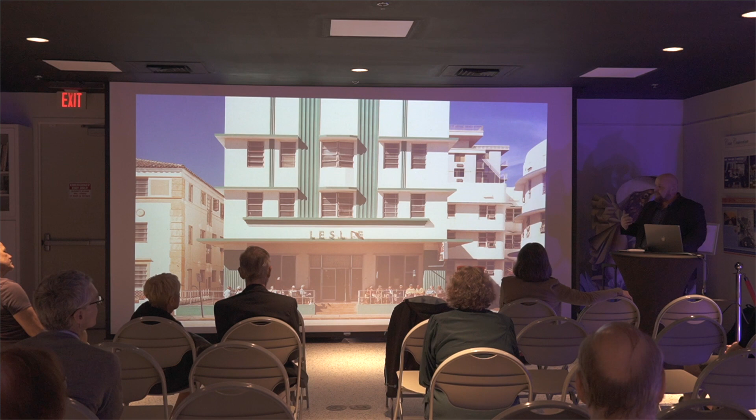We were given this opportunity where we answered a call from the Housing Authority of the City of Miami Beach to look at affordable elderly housing. This is a critical need that we have here.

In the firm, we look at the idiosyncratic, bespoke nature of a place. What you'll see in all of our architecture probably doesn't show a certain style, because we're always trying to find the place to tell us where we take our cues. Those cues can come from nature, they can come from the architecture.

We were looking and really interested in this kind of Miami Beach red, which is interestingly pink. I always wanted to make a pink building.

This building was called the Heron. It was given to us by that. The fact is that we had Messi now, which we didn't have when we first designed the building, but now you have the football, the soccer league, that is the pink Heron.

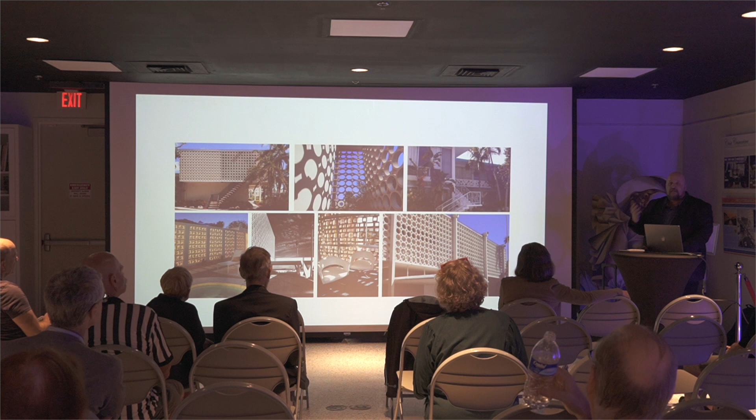So anyways, we were really intrigued by this kind of attitude, but I love breeze block. This was such a ubiquitous material here. How do we begin to think about that? So we went and designed this project.

So this is 20 units of elderly affordable housing. And this is in Normandy Isles, right there on Marseille Drive at 1158 Marseille Drive.

Unfortunately, there is a Gilbert Fein building on this site, and it's a 4-unit, single-story building. It has a triplet, but it has twins off to the west side of it that actually form the courtyard. So this one was like half a court.

But it is also very susceptible to tidal flooding in there. It's a very low-lying area. And so we were challenged with how do we begin to think about this.

One of the critical aspects is how, if we did raise the natural grade, but this was thinking about 6 feet of sea level rise or so, we have to build up to these new levels.

Some of the things we began to look at were the scalloped facades, the scalloped walls that you would get, evocative of the Miami modern kind of style, or even Art Deco had some of that, but the breeze block, these other elements.

Also how do we create these terrace stairs so it doesn't just feel like a major stoop, but feels like a social space. We wanted to minimize that, and that's why even the lower stairs are a social stair, more amphitheater-type seating, where the main stair is off to the side.

That's where you have these rails, and then you have ramps that move in off the side into the building. But one of the things you'll notice is there's a stair front and center. This is elderly affordable housing.

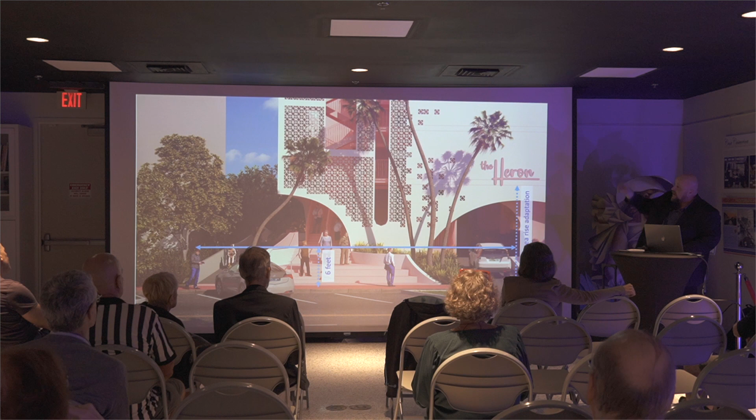One of the things we want to think about is active and healthy lifestyles, not making the elevator the first thing you see, but making the stair and this way in which we could bring the street into the building, what we call this social street, up to the 4th floor.

So if I go back real quick, at the top floor, the 4th floor, there's a large roof terrace that looks out, and that's where the community room is. It's this kind of sculptural front.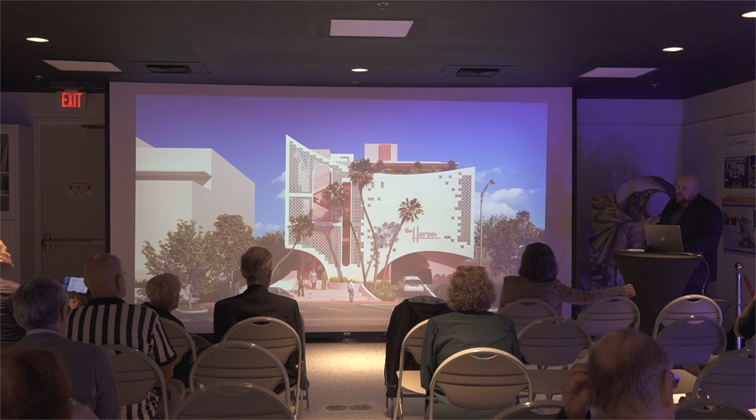Now, if I took the breeze block building, or breeze block jacket, off, you'd probably say this is a pretty ugly building, not much architecture, because it is affordable housing. But I always look at this and attribute it like a Greek temple. What was a Greek temple other than a dumb box with a great wraparound porch?

Architecture is really in how you skin sometimes the buildings, but it's the spaces and everything when you get into these. So we were really cognizant of how that breeze block, how this landscape and how it ties back into the community in a very harmonious way in the scale.

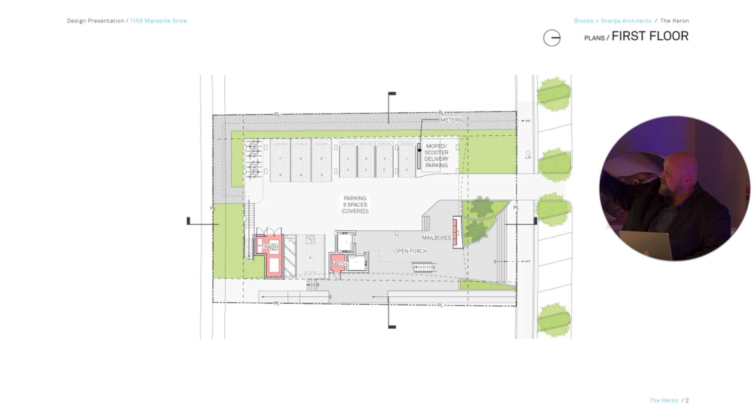We're not alone here—the Housing Authority is also building another 4-story structure just to the east of this, and then there's the 1-story structures from Gilbert Fein to the west of it too. But this is the ground floor, so it is parking.

Miami Beach does not require parking for elderly housing, but we put it in anyways because we want to be good stewards. We were taking out 2 parking spaces in the street, and as elderly residents, they're going to have deliveries and other needs, so we wanted to ensure we had those. You can see how far back the elevators are tucked in there, along with the mailboxes.

But you get this kind of open porch space where it really becomes a social space as you move up into this pinwheel stair. These are studio units, meant to be single occupant units, but they're all around this kind of breezeway, and then you get the other stair on the bottom left there.

This whole thing orients to the southeast, to our prevailing breezes, allowing open airflow to move through these spaces so they become naturally ventilated. We've done a lot of the math on this, checked the energy modeling.

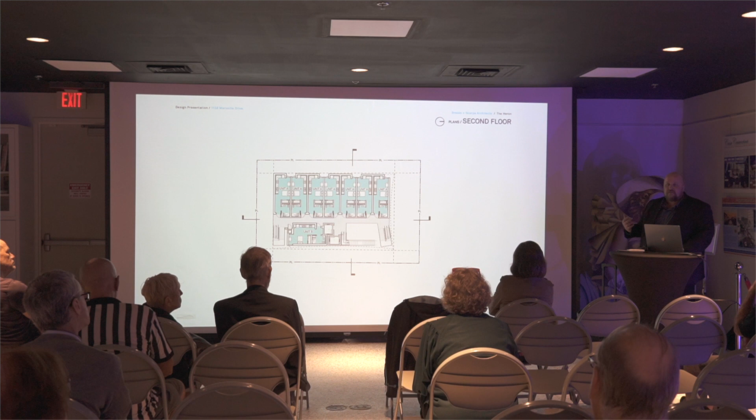One of the things we think is that affordable shouldn't just be your rent on the day you move in and how you build it—it should also be about the residents who live there, making it affordable. We're projecting their electric bills to only be about $30 on average a month, even if they closed all the windows. But we've designed the windows to allow passive ventilation to move through.

Then you get up to the 4th floor, where that community roof terrace is, where the code requires a step back. We wanted to make that space a social space as you come into it. This is the section—you can see through the community room, that social stair, and how it kind of gets built up.

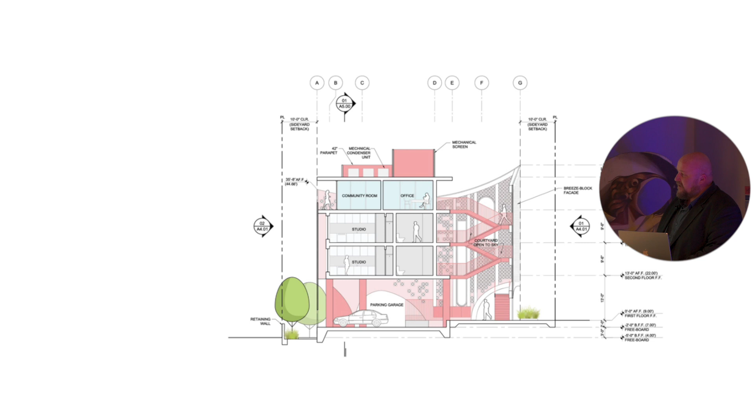This shows what would happen if you had an Irma-like event with 6 feet of sea level rise—how high that top blue line would be in this space. This is why it's so critical that we build in a flood adaptive way.

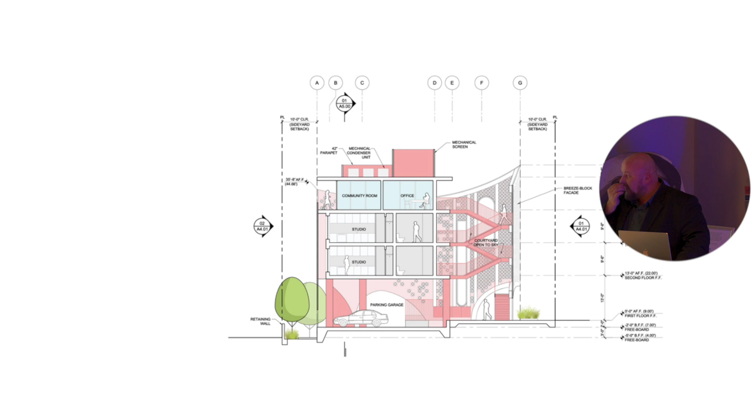Some of what we're doing on that ground floor is putting what's called Xypex into our concrete. Everybody knows, unfortunately, what happened in Champlain Towers South in Surfside. Part of that was that salt water is cancer to buildings. We also put rebar, steel reinforcing, in a lot of our structures, but salts that get into the concrete will actually spall it, make it chip away. So one of the things we need to do is really make sure the concrete is not permeable, and Xypex is an additive that helps us do that.

We're also using galvanized steel. We want to look at fiberglass or basalt, which is an alternative to steel. But the biggest challenge isn't when you're below the water table—you can put all the steel you want there because it won't rust out. It's where the tidal zone happens, where this littoral area drops up and down with the groundwater.

That's where it gets flooded, and that's where the biggest challenge is—where you need to look at more innovative ways to do it. This is the irony I find: FEMA makes us design flood adaptive architecture, but they're not thinking about the materials of our buildings. They only think about how we design the ground and make sure the structure doesn't fall down during the storm, but over 40, 50 years, that's where the real challenge lies.

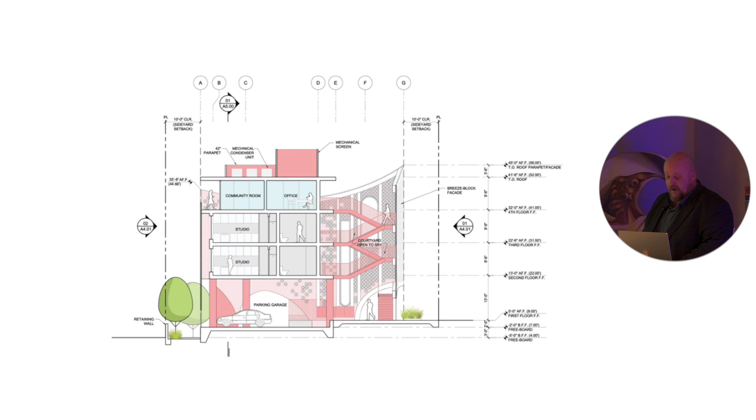And so we're now in Normandy Shores working on 119 units of elderly affordable housing. This is a really tough, challenging site, because it's even lower than what the Heron site was, just one island over. We have some incredible challenges where the city's also already preparing to build these roads up about 3.5 to 5 feet in the future. So how do we begin to tie them in?

So again, you can see the terracing steps. That terrace is actually at that new street level. We're thinking about how do we make this resilient, so in the future, when they do raise the road, it doesn't look like it wasn't intentional, that we have something like you see happen in Sunset Harbor or these other areas, like it looked intentional that you have these elements.

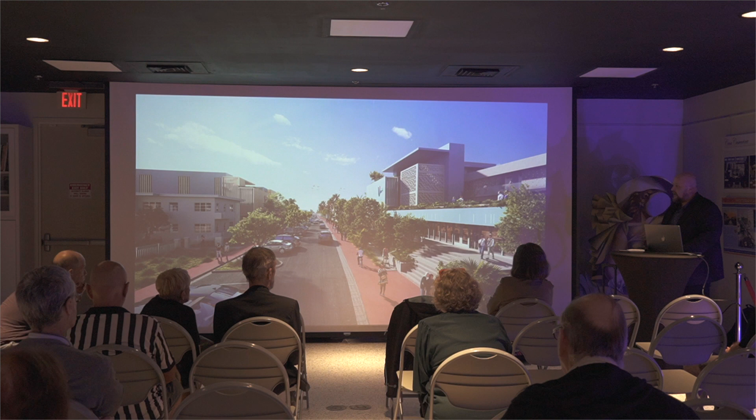It's unfortunate because you have some of the buildings around us that are just very low lying, but what we're still trying to do - this is the Breeze project. This one's right on the Biscayne waterway, so this one's on the water. The other one is actually on the golf course.

And these are the two vacant lots. If you look at South Shore Drive on Normandy Shores, there's two vacant large parcels. Breeze is actually under construction right now - we're rebuilding the seawall, and they have their signs up. They're starting construction in December for the buildings proper.

But we're really trying to be sculptural with the facades, much like the MIMO or the Art Deco styles, but really pushing back and trying to respect the neighbors and that kind of massivity we're looking at, using breeze block accents and just lifting these buildings up. This is kind of what the current code allows us to do - you get a step back at the 4th floor, you get a massive building, but we want to break it.

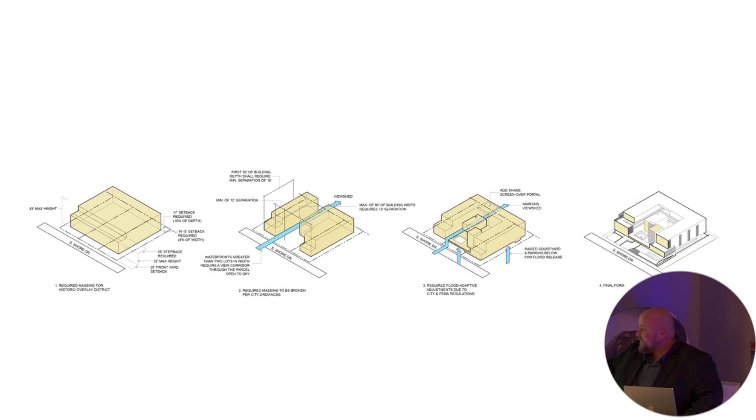Some of the things you'll see is again this challenge of how do we ensure that the people living here can stay here. It's a hardened structure, meant to withstand a Category 5. They can stay in place and shelter in place during this. It's got generators, and even if there weren't generators, just like you saw after Hurricane Irma, where we lost power for 8 days, and unfortunately in Hollywood, where a lot of elderly residents passed away because of the heat - it was because those buildings were not designed in a passive way, and they were designed with fixed windows.

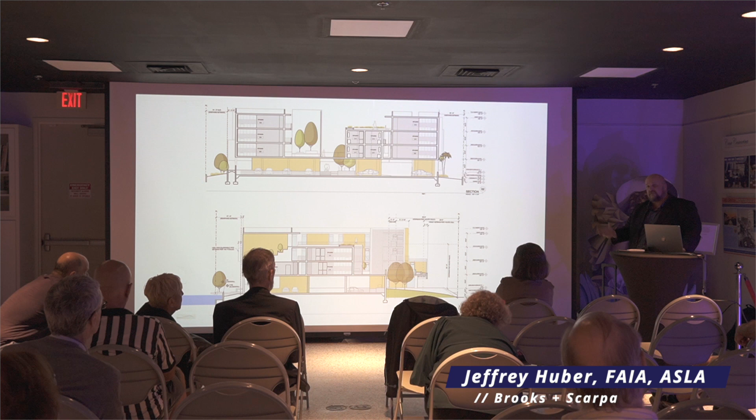And so we're really being cognizant, again, doing the studies that understand how wind flow is going to work through here. I'm not saying you're going to be cold, but you're not going to be hot, right? It's going to be comfortable - that's what we tried to design it for, is comfortable.

And so this is - you can see the blue down here on the bottom left, that's the actual Biscayne waterway. One of the things we're really cognizant of is opening up some of these social spaces, making another social stair at the 3rd and 4th levels where people can sit out and watch the water, watch boats go by. There's really a thought process here, and this is the backside you're just seeing of that portal, that social stair, and kind of hanging out.

And again, I hate always showing this because you can see, like, this is if it was king tides like we're having right now. But those are fairly low structures, and what we're really trying to build in is a living shoreline. We're being very cognizant of protecting our neighbors and how we're designing to where all the stormwater that's on our site - and this is a problem when you start raising structures, you can push that water off to your neighbors if you're not careful.

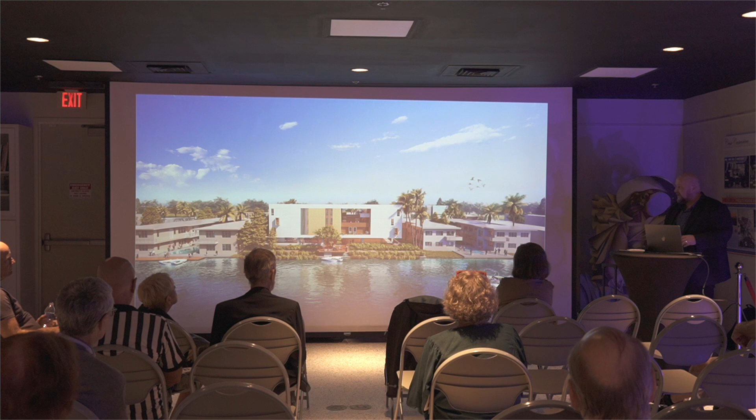So the first thing we did was work with these neighbors, talking about it and ensuring we had the right civil engineer. The good thing is I'm a landscape architect and an architect, so we were doing all of this with our project to really make the site a sponge and thinking about it in those ways, but also making it a piece of artwork and a piece of community infrastructure that we can see will be here for the next 60 years in its intended lifespan.

So with that, I'm done. Thank you.

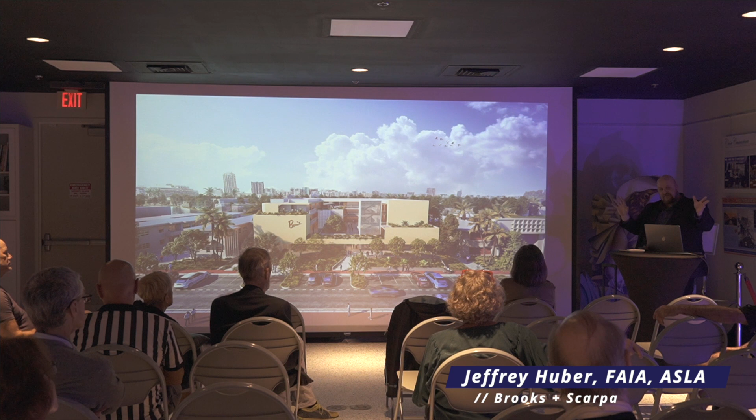One of the things we're putting on the front that we're not showing in this image is a sparkle grain. It's actually some glass chips, so when you're walking by or driving by, it's going to sparkle. My partner always says we're going to be playing Liberace while you walk by these. So at least the material, even though it's a ubiquitous material like stucco, which is what we can afford, we're doing something to it that's at least a little bit more unique.

Some of the other things you'll see is there's not a lot of windows facing the street on this. They're all facing the social space, because we only get one shot to have one window or two windows. So they're looking at the sides or looking at the back.

This is really more about a sculptural element, and we want to remove rails. You can see at that second floor where all that landscape is, we're able to step the landscape to remove any rails from there. So you really have a connection to the street, because that's the other critical thing, getting connections to the street. These terraces really allow for some of that aspect.

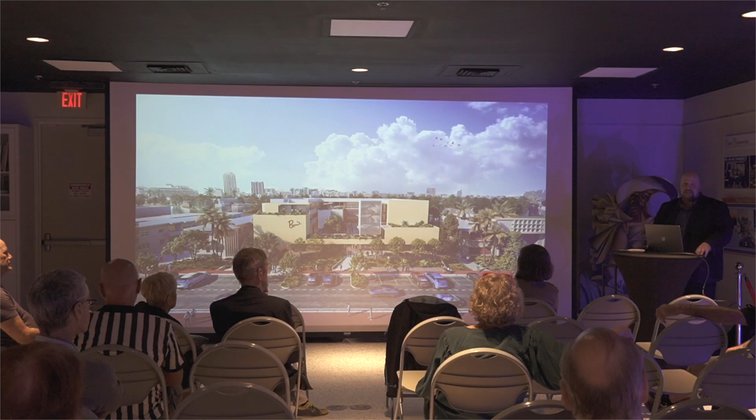It's about the cost and where we want to spend money. If it was a museum, I could do a lot when you have a $1,200 a square foot budget. But when you have a $350 a square foot budget, there's not much you can do.